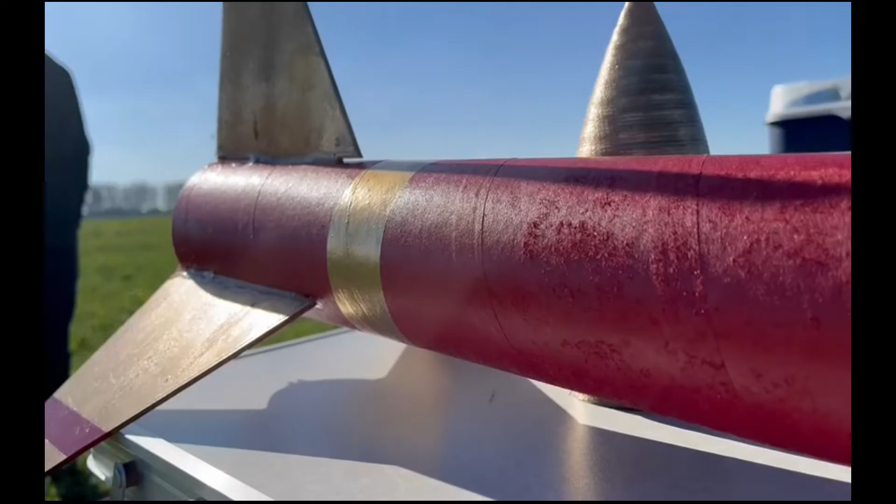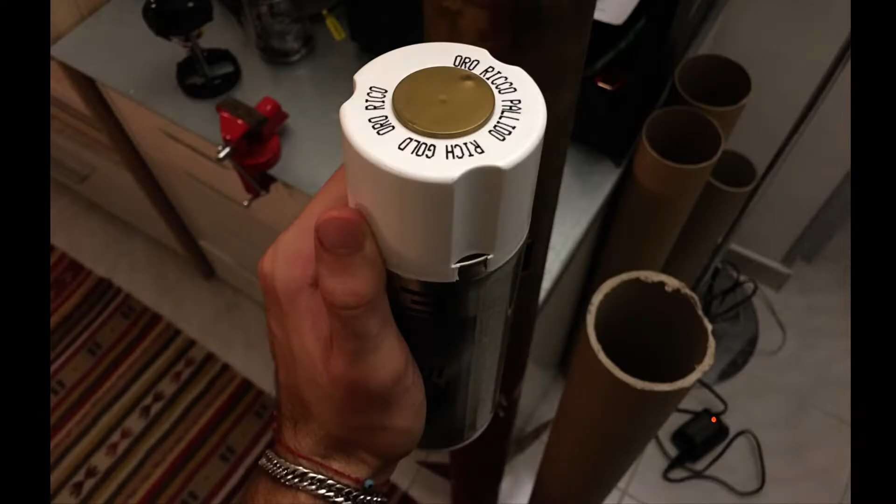Let's dive into which materials I used to build this rocket. So okay, let's start with the body tube. The body tubes are 8 centimeter diameter cardboard, painted with unusual colors. For this project I decided to make the rocket flashy. For the lower tube I used a red spray can, and for the upper tube I used a gold spray can.

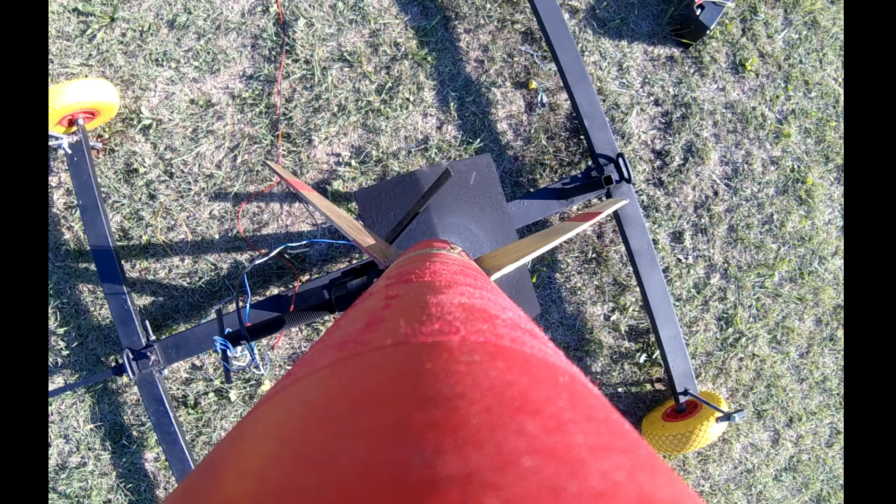So now talking about the fins. There are 3 fins on this rocket, made out of PLA with a 3D printer. Those fins go through the body tube to be glued to the 38 motor tube with epoxy. So was it a good idea to 3D print the fins? Actually the answer can be debated.

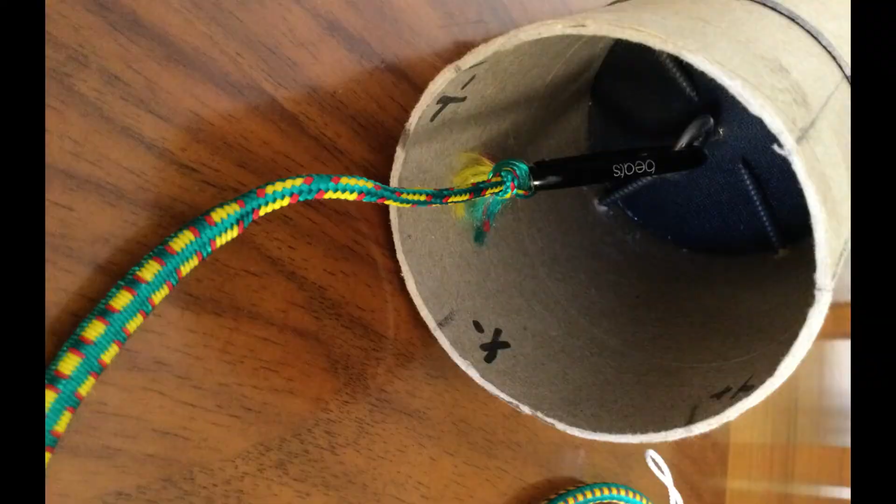During the flight, the fins were a little wiggly. This is caused by the elasticity of the fins. The fins are made of PLA, and PLA is very elastic. The bulkhead is also made out of PLA and retains the parachute.

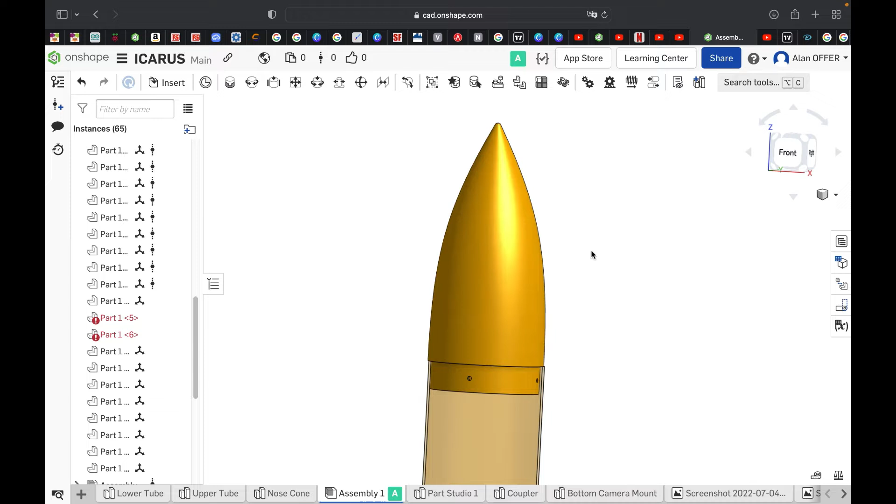So now let's dive into the CAD of the rocket. Okay guys, let's look at the CAD. Starting off at the top of the rocket, we can see the nose cone. It's a pretty normal ogive shape. This ogive is made by me, I 3D printed it, and it fits in this 80 millimeter tube by screwing 4 screws, and that's it.

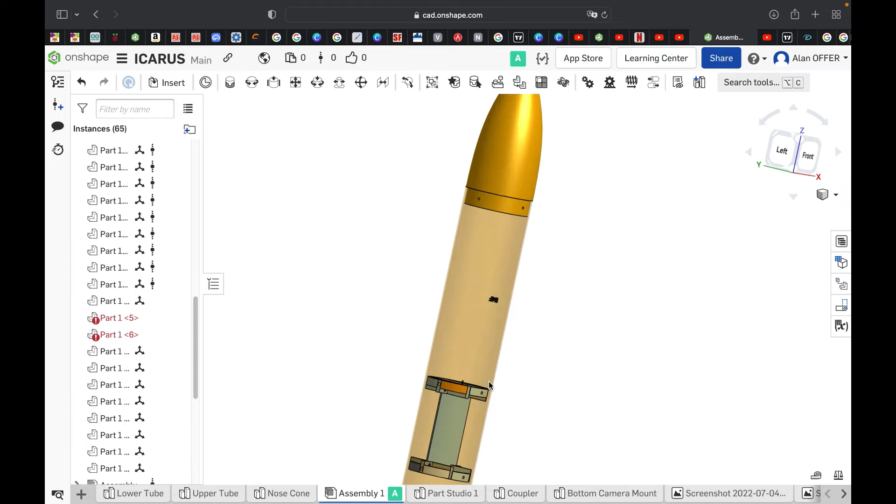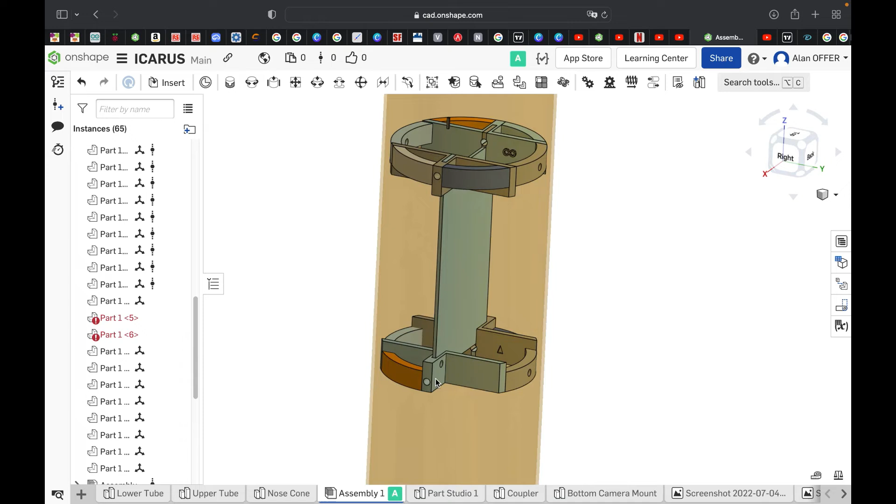Down here we have the CAD model of the computer Geronimo. Those are the supports that help fit the computer into the rocket. You have to screw 8 screws. Oh, there's a missing part here. The computer is placed into the support by screwing those 4 screws, and then this whole stack is placed into the rocket with 4 screws.

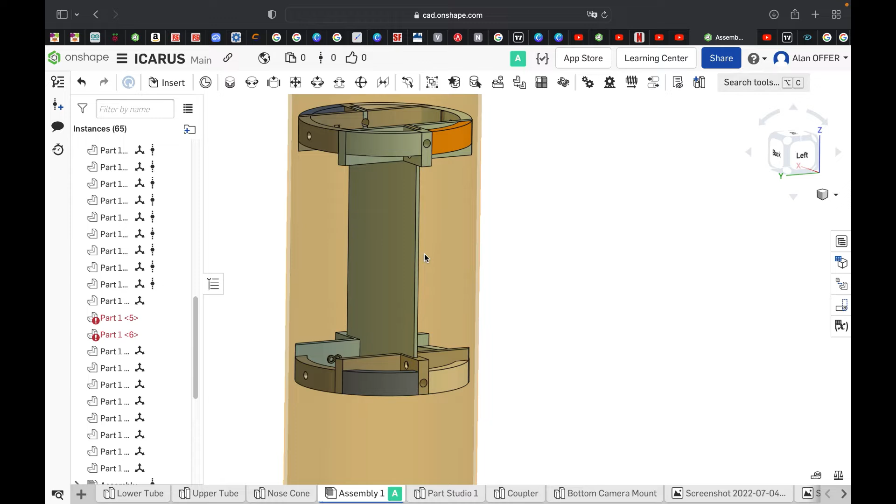Here it's not modeled, but actually there is a hatch here, an arm switch to activate the rocket. In the onboard computer video, I will show you the arm switch. Going down, there is this coupler, pretty basic, epoxied into this part, and it slides into this lower part of the tube. This is a bulkhead, and it keeps the upper part attached with the parachute.

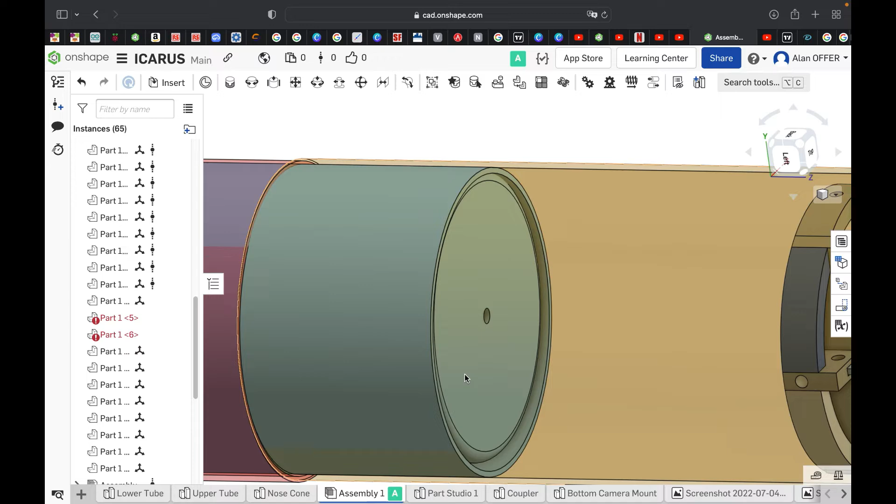So I hide this lower tube. Actually here we are gonna put an eye bolt screwed into this bulkhead and epoxied, and then going down we can see this lower tube, 80 millimeters interior and 84 millimeters exterior in diameter, and this is the model representation of the parachute.

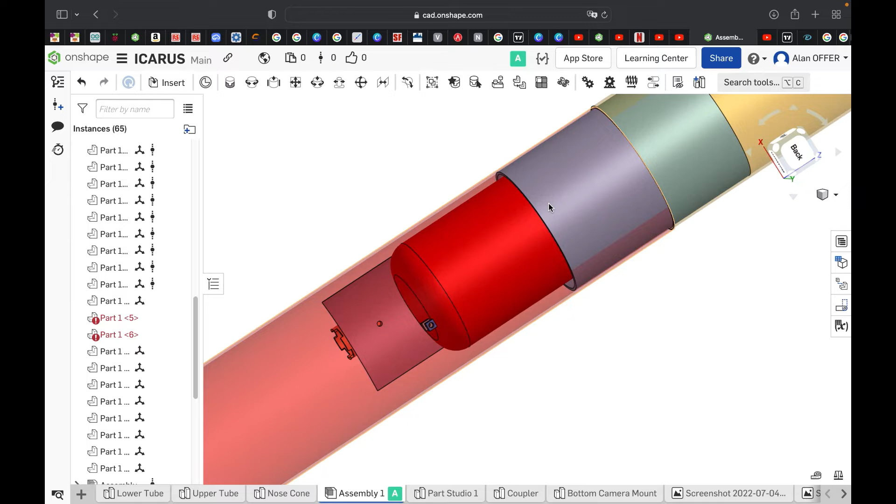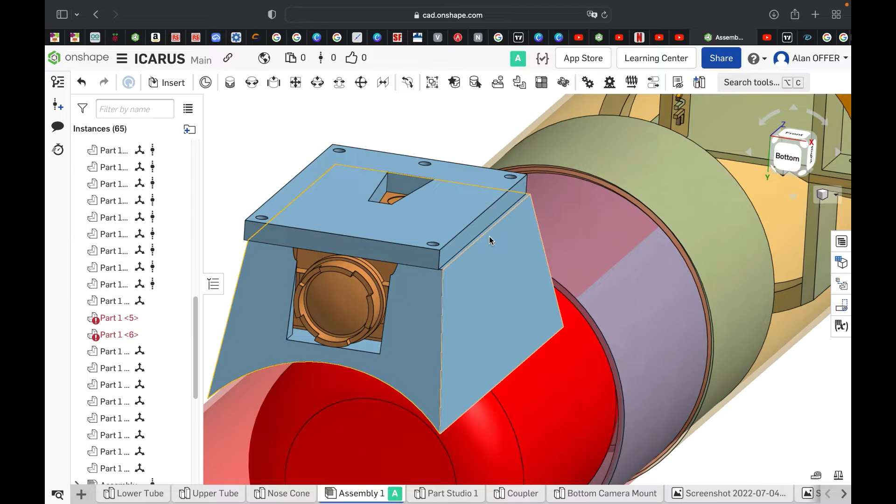We're gonna see in the recovery system video that this parachute is a 120 centimeter diameter parachute, and it helps a lot to slow down the rocket. Near the parachute we can find the camera, the RunCam camera. Those are the 2 supports that keep the camera on the rocket. Those supports are 3D printed in PLA. I used a lot of 3D printing in this rocket.

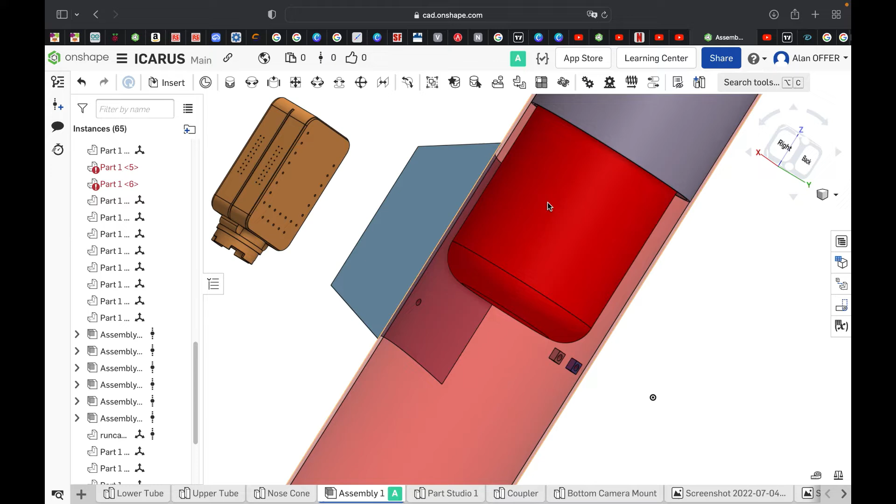This support is screwed into the lower tube near the parachute. I have to admit this is not the best idea I had. Indeed, the parachute could have interfered with the screws. Fortunately, it didn't happen. But you know, in rocketry, you have to be careful of all the details.

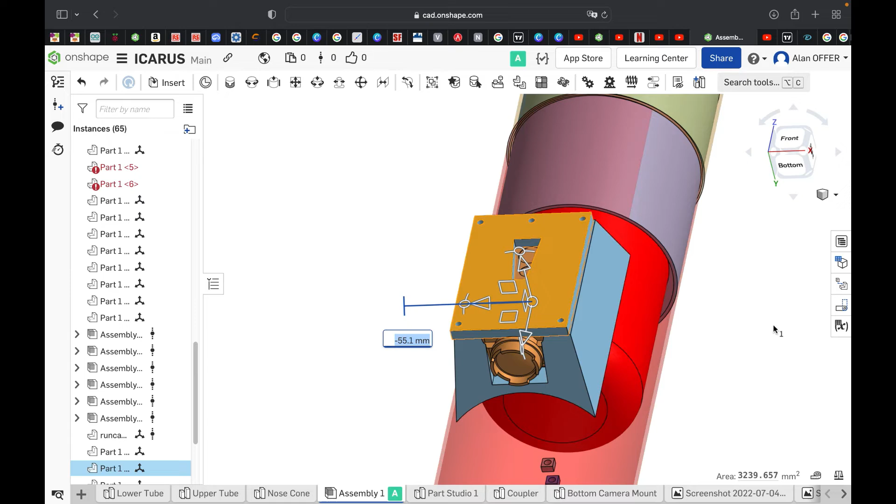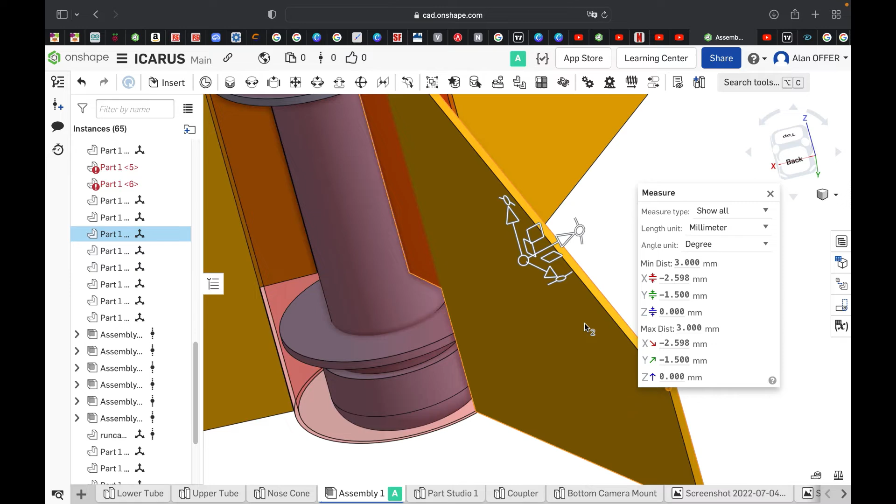So this camera goes down like this, and then the upper support goes in with 4 screws, and the camera is placed. At the bottom of the rocket we can find the motor section and the fins. Talking about the fins, they're made of PLA, and I have to admit this is not a good idea. The thickness of those fins is 3 millimeters. This is not enough. In the next rocket I will probably change the material or design the fins better.

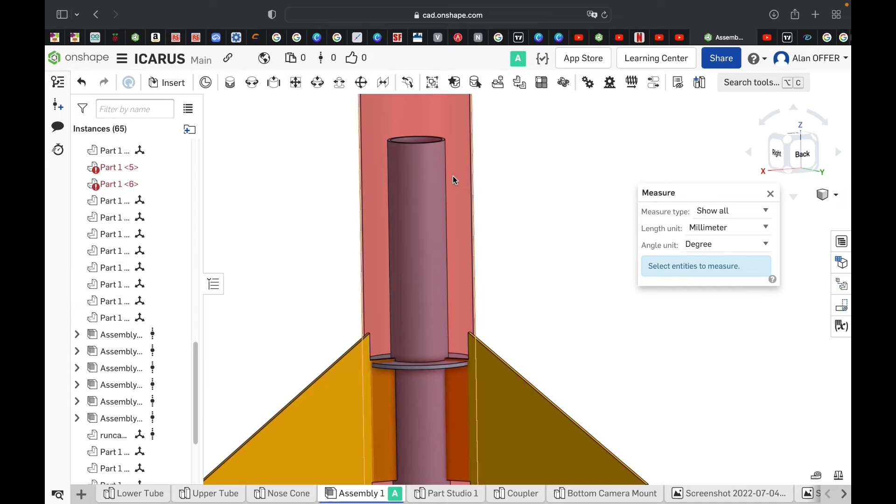Continuing here, we can see the 2 centering rings with the motor tube. The centering rings are made of PLA once again, and this is a pretty basic rocketry motor tube you can find on the internet. This is 38 millimeters, so it's made for 38 millimeter motors.

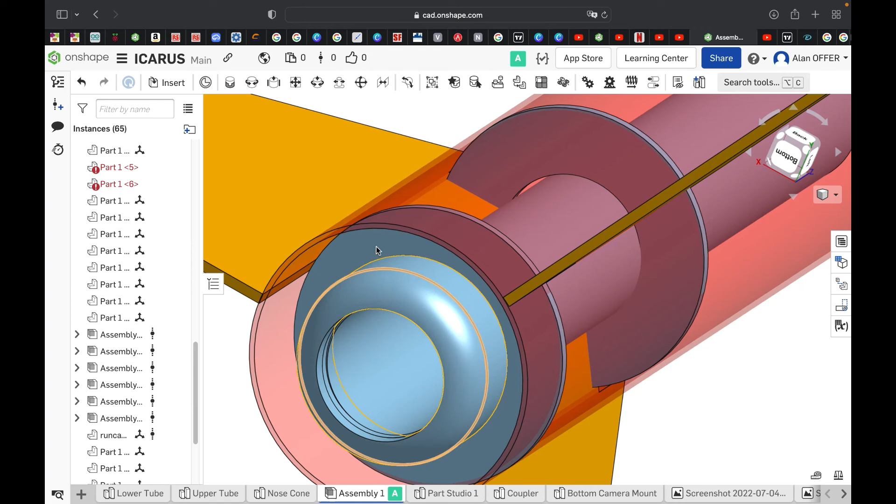Here is the retainer made in PLA, which I designed, and I have to say this solution worked pretty well. You can find those retainers for $20 on the internet when you can design them yourself, and the result is the same. So that's it for the CAD.

So now, what would I do better next time? I think I would maybe change the material for the fins, or try to find a way to make the fins stronger. Another thing I will change, maybe the tube. The tubes were suboptimal. They were not strong enough. Next time, maybe I will take tubes with a larger thickness, or maybe some fiberglass. Finally, I will try to avoid putting too many screws into the rocket.

So that's it for today. Next video we're going to talk about avionics.